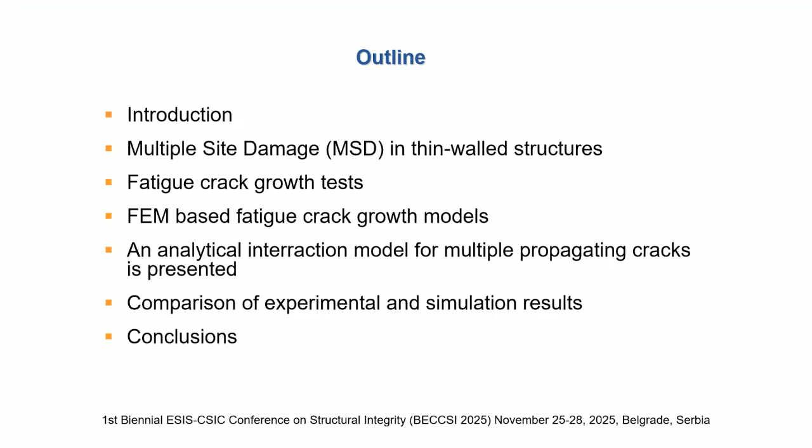So here is the outline. I will give a short introduction, then we will speak about multiple site damage in thin-walled structures and fatigue crack growth, present results of fatigue crack growth tests, then finite element-based fatigue crack growth models, and present in more details an analytic model for modeling interaction of multiple propagating cracks. We will compare experimental and simulation results and draw some conclusions.

Cracks may initiate at sharp notches, flaws or sites of stress concentration due to geometrical discontinuity. Several cracks initiate in a line, so-called multiple site damage is generated. It can eventually lead to crack coalescence, creating large-scale damage. Thin-walled structures such as aircraft and ship structures are prone to fatigue cracking and multi-site damage or multiple cracks.

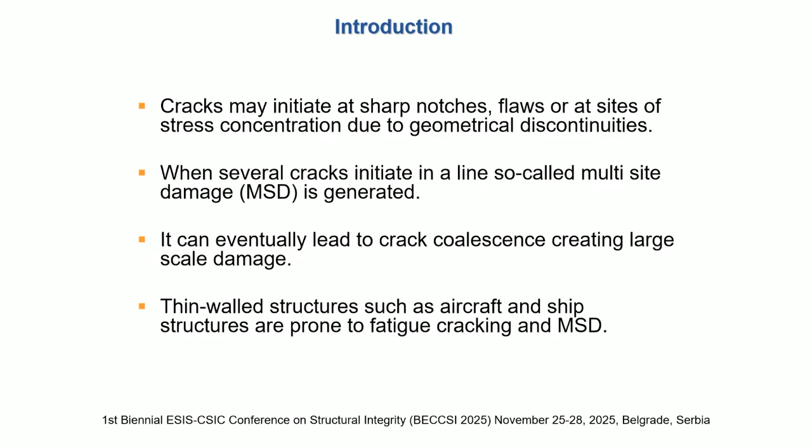Professor Željko nicely shows stages in the fatigue life. So we declare the initiation period and crack growth period. Here we speak about the crack growth period, about growth of large cracks.

As you know, we can do experiments and obtain the crack length with respect to number of cycles. Then from this we can design a crack growth rate diagram. And from this diagram, we can assess, for example, Paris equation constants or any other power law constants.

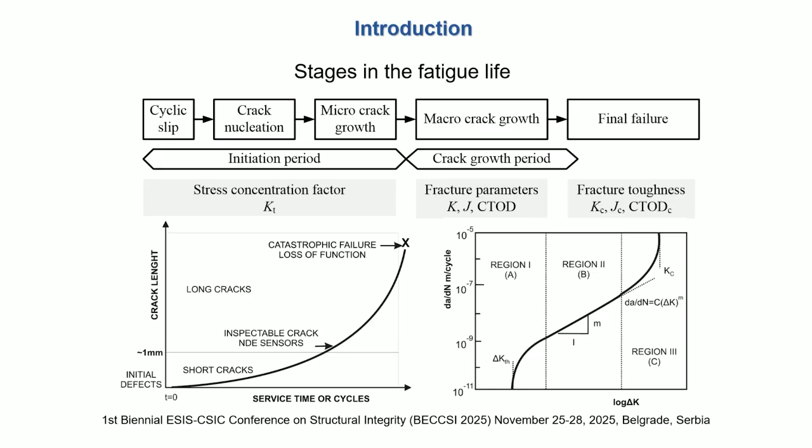So what is multi-site damage? Fatigue cracking examples - here we see a Aloha Airlines Boeing 737. This accident occurred in '88 or '89, I don't remember. What we have here is at the upper rivet row, initiated cracks at the rivet locations. Then on the surface, loading cycling under cycles which are caused by landing and taking off. Cracks are initiated, they propagate, they coalesce, and in this case, large-scale damage is generated.

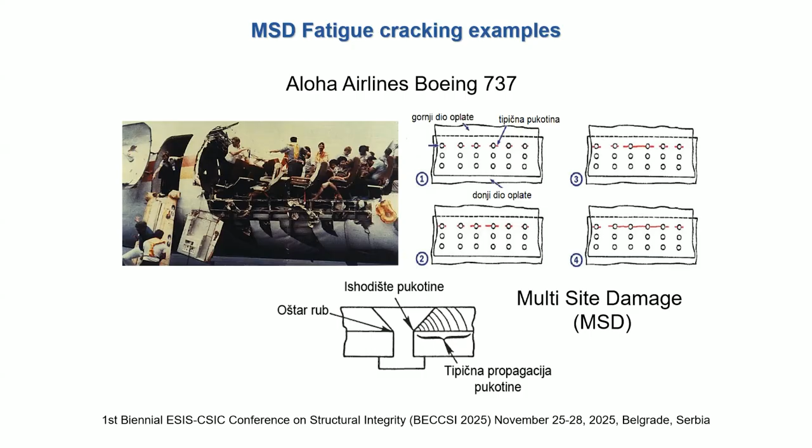Similar situation we have with ship structure. What you can see here is the deck structure turned upside down, and you have different panels in longitudinal directions, and you have also bulkheads every 5 meters. These details are produced by welding, so there are stress concentrations due to geometrical discontinuities and residual stresses. Cracks initiate here, similar to the Aloha example, on several occasions.

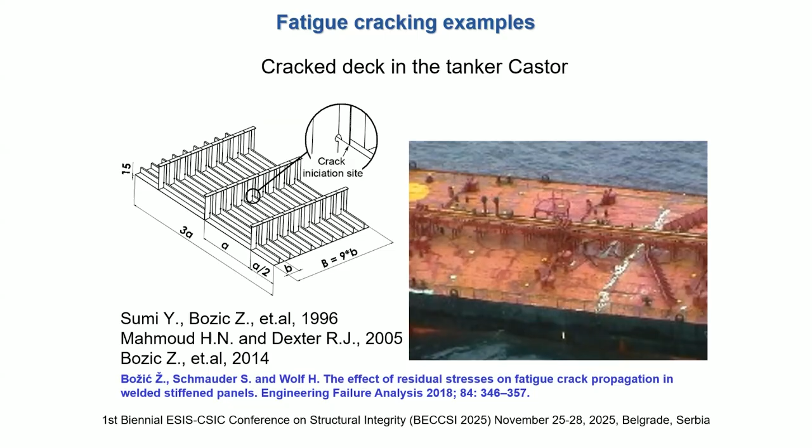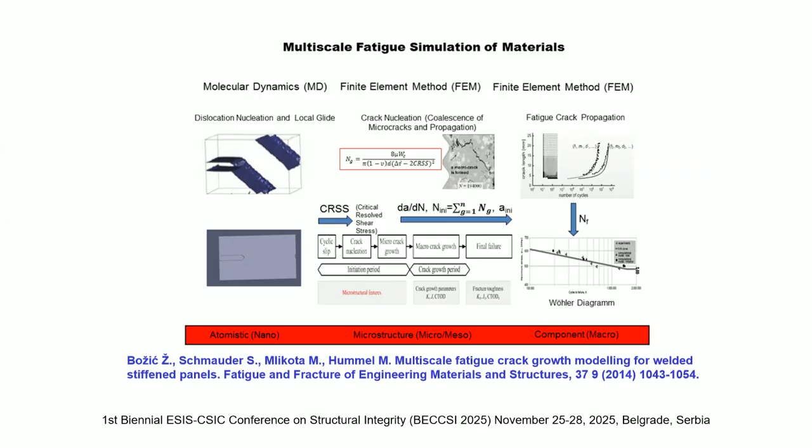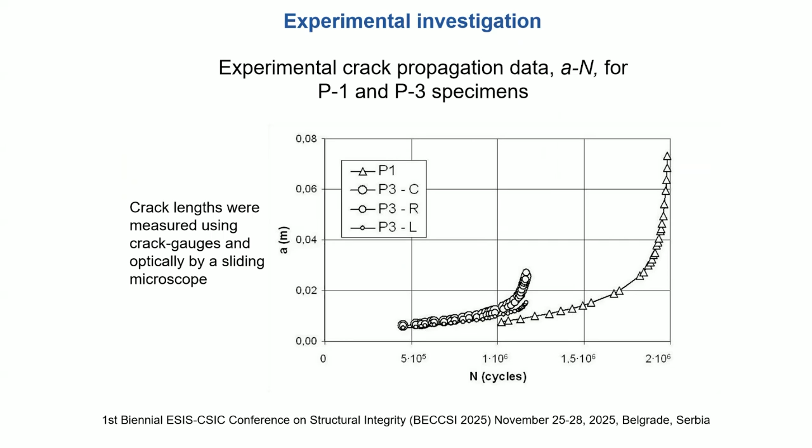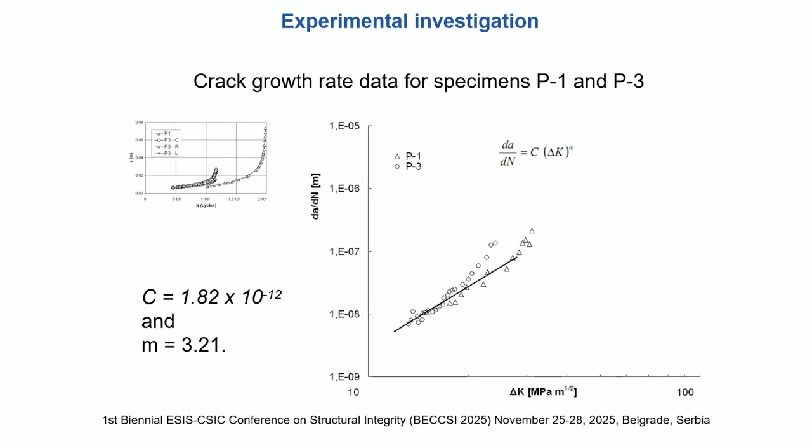This is what we obtained or analyzed experimentally, and we want to simulate this. For this, we will use the Paris equation as shown there. As mentioned before, we generate a crack growth rate diagram, and from this we obtain constants like C and M as shown here.

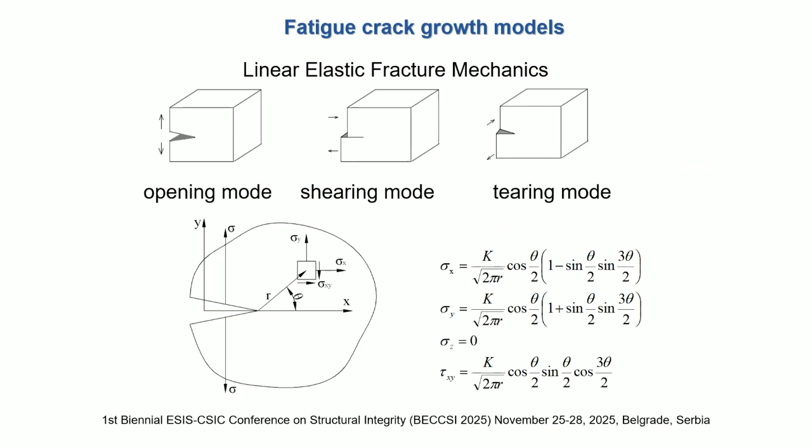And basically we have here mode 1 opening, only mode 1. This is how we look at this program. The cyclic loading, we have crack extension for each cycle, some delta A, and then use Paris equation to simulate this.

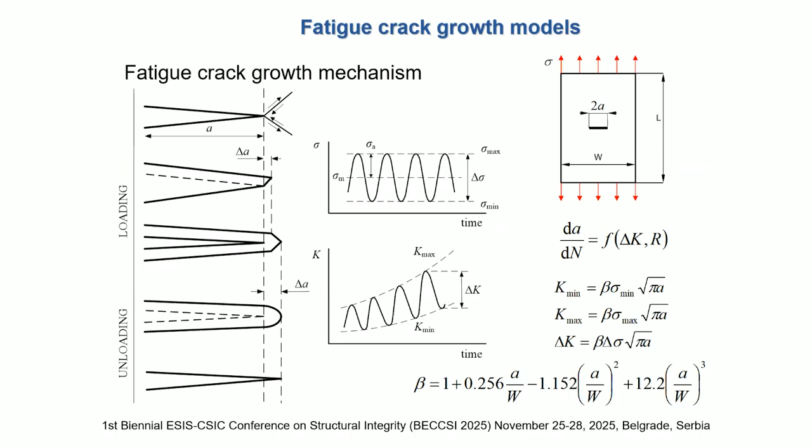This is our specimen P1 with 1 central crack. To simulate this, we can use Paris equation, but we need stress intensity factors. They can be calculated analytically, but it's better to calculate them numerically.

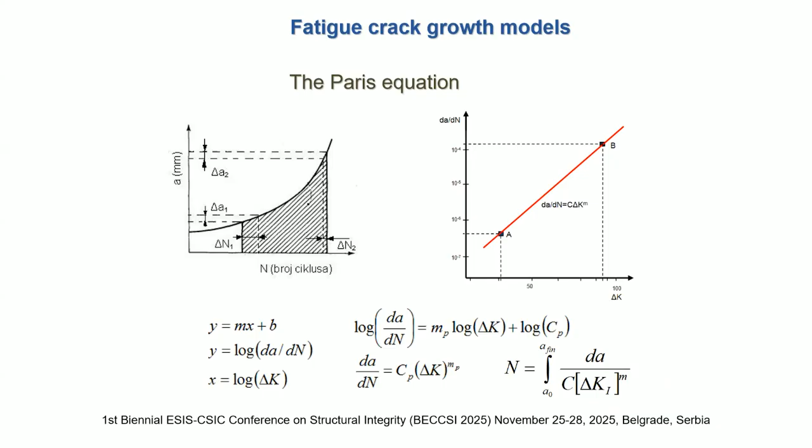This is very fine, we all know this. If we are not limited to the Paris model, we can use a modified Paris equation and consider delta K effective, the so-called Lukáš model, or we can use the J integral, cyclic J integral, effective J integral. We also can consider CTOD, and in nonlinear fracture mechanics, CTOD and J integral are correlated.

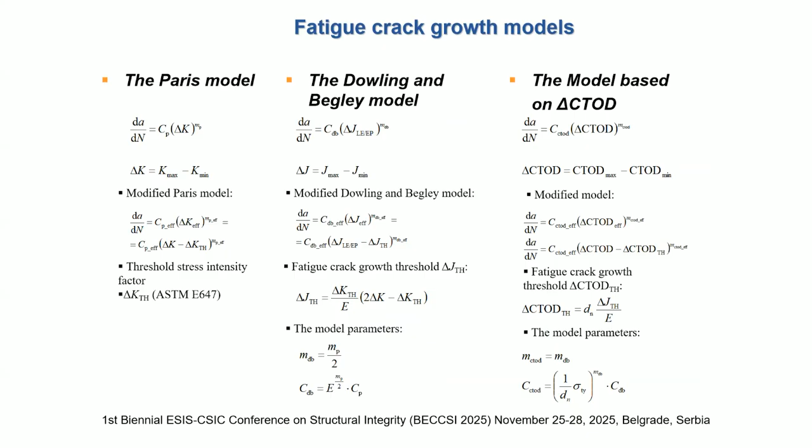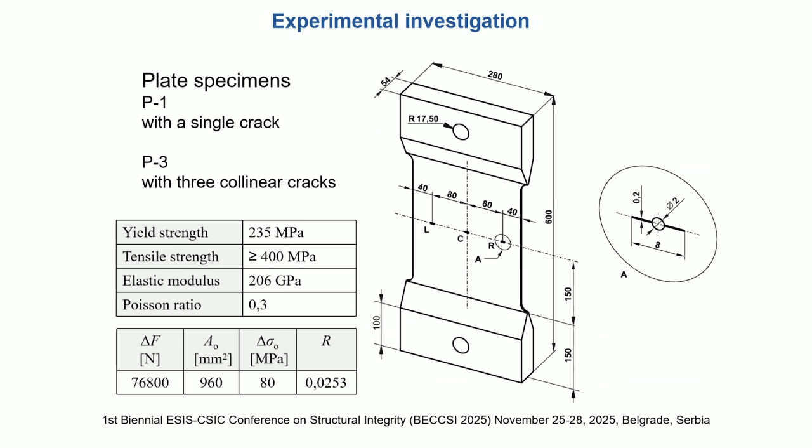So for our specimen, we have our specimen here. We can consider only 1/4 of this specimen in finite element, due to double symmetry. This is what you see here, 1/4 of the specimen, and this figure shows the stress intensity factor range with respect to crack length, with respect to half crack length.

So we have K now, and we have K not as a function, but as discrete points. So we will integrate this equation numerically.

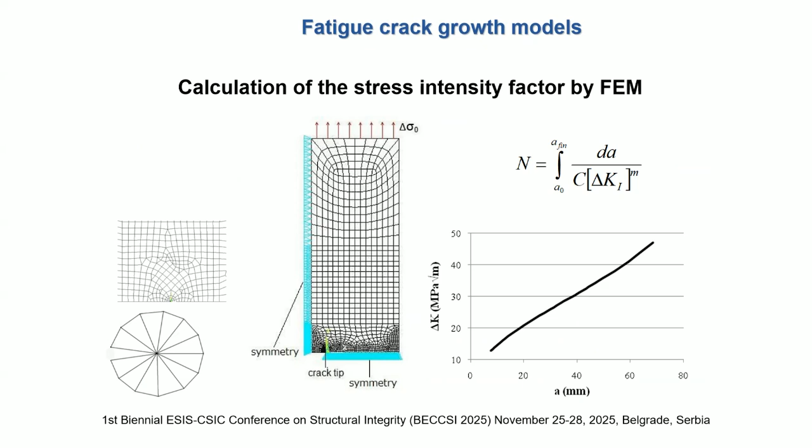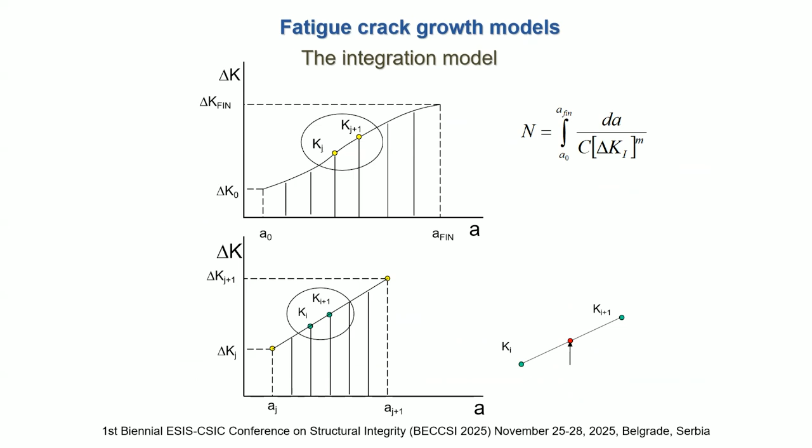Basically what we have here is a straight line between two points for which we calculate K. So it's a piecewise linear curve for which we calculate the stress intensity factor by this method, and we will integrate this equation directly.

Stress intensity factors calculated for P1 specimen shown here, and that's very easy to do for one specimen with a single crack.

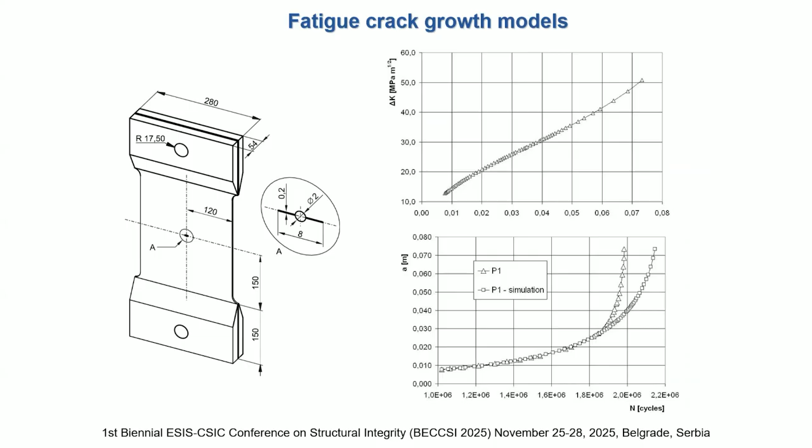And then we have some statistics done on the experiment of constant crack propagation, and the simulation is still using this model, according to which we use Paris. So this is what I just mentioned.

And for specimen with 3 cracks, this is the experimental result, and we want to simulate now. We want to simulate fatigue life of specimen with 3 cracks, and then it comes what I mentioned at the beginning, what also Dr. Son mentioned, interaction of this. How can we model interaction with cracks?

You can use the extended finite element method when you use that. And sometimes you don't have everything under control, but you have an analytical model which is perfectly under our control, and we will learn how it works.

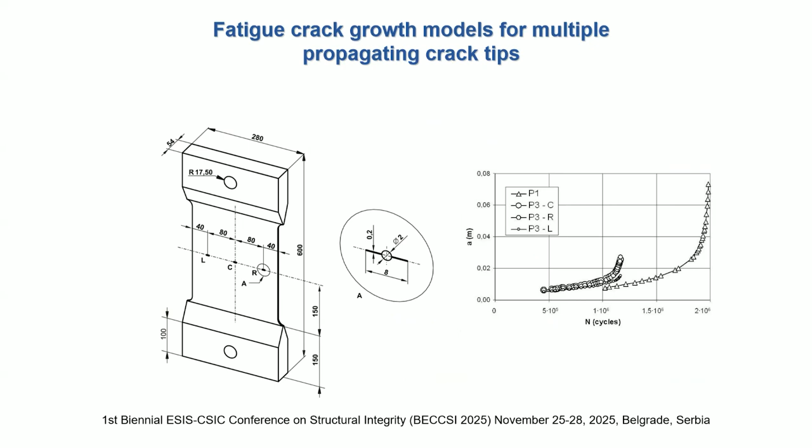So this is specimen with 1 crack before the experiment and after the experiment.

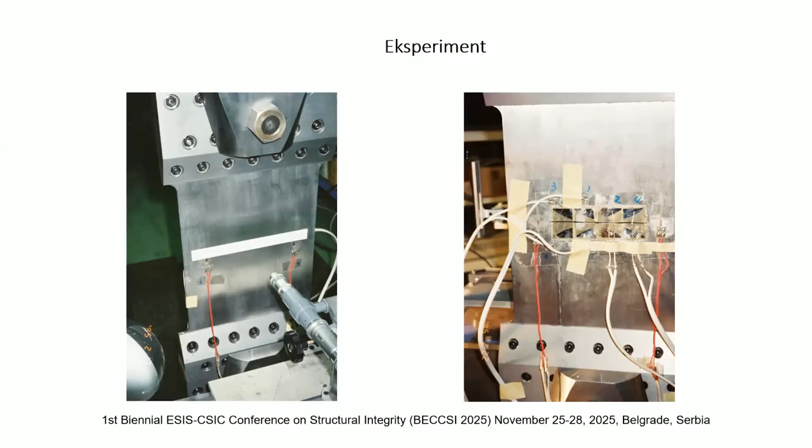And so this is 1/4 of our specimen. We have 3 cracks, but due to symmetry, we have only 1/4, and we can basically have 6 crack tips, but due to symmetry, we consider only 3 crack tips, 1, 2, and 3.

So we show them here. What do we do? Well, at first we should assume initial crack length, and we have taken this from our experiment. The cracks were of certain lengths. So we started from the experiment, then we simulated and compared with this later with the experimental result.

So we have to take 1 crack tip as a reference. This is, in this case, tip 1. And for the other 2 tips, then we should see how they interact.

And so this is what we have as a first one from our experiment.

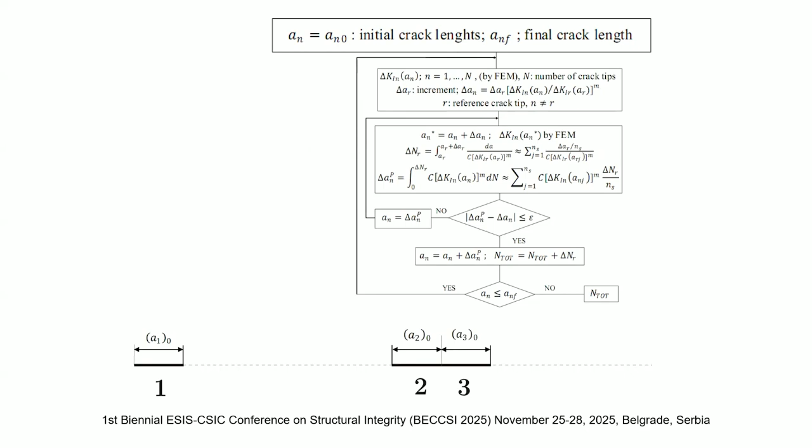Then we give some initial increment for the reference crack tip, and then we assess increments for the other 2 crack tips by using Paris law in this way - good way to do it. Then we have this assessed increment for crack tip 2 and crack tip 3.

And then we have to check, is it good or not? How do we check this? We will calculate delta a by the opposite way. Now we don't calculate number of cycles, but we calculate propagated crack length. So we do this for tip 2 and for tip 3. And then this is better, it is better.

This, and we should repeat these steps until we receive convergence. If we receive convergence, when this difference between assumed and calculated crack length is less than some limit which we give there, some tolerance. And then we repeat this, we repeat this, and when we reach some final crack length - this final crack length can be determined by, if fracture will occur, if a crack reaches our critical crack length - so, some crack length before fracture occurs.

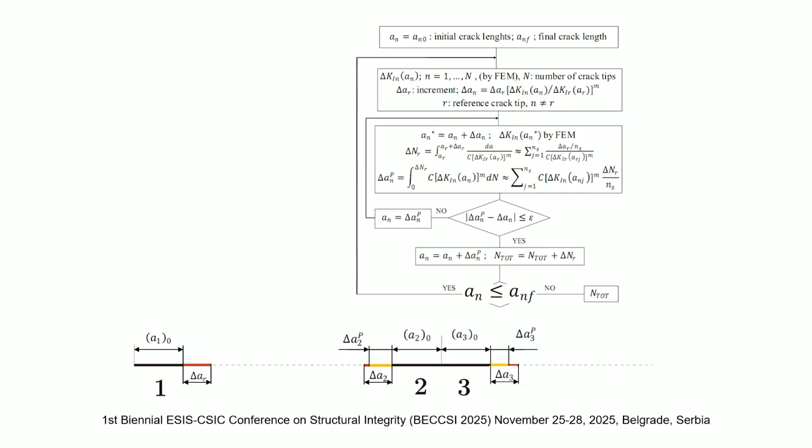Yes. And then we show results, what we have achieved. So for these 3 cracks, we had stress intensity factor ranges shown there.

Then we compare simulation results with experimental results. You have this big circle for tip 1, and circles, small circles, for average crack length for tip 2 and tip 3. That's for the experiment - the big circle and the small circle. And then we have simulation results as rectangular marks. You see that for initial crack lengths, with our solution we have very nice agreement with the results.

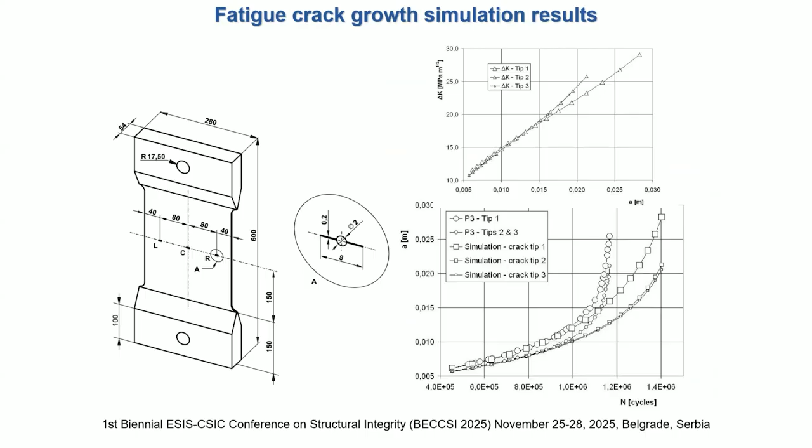And how do we know that what we have simulated is good or not good? We have taken as a reference crack tip 1. So we will repeat the simulation, we will take another crack tip, tip 2, as a reference. And then we'll compare these 2 simulation results.

This is what I wanted to show you - this analytical method for taking into account interaction of multiple propagating crack tips. We can do more examples, some cracks can be longer and others shorter, and again to see this interaction. So basically, there is no interaction if these cracks are far apart and if they are short. But if they are big, then there is very strong interaction.

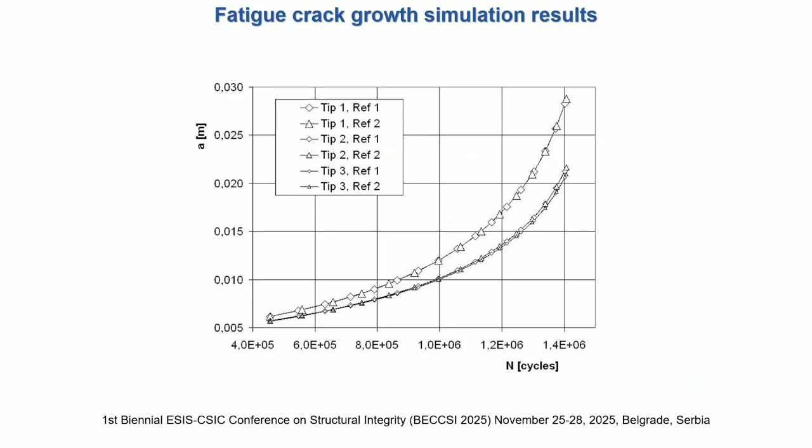Fatigue crack propagation life, especially with a single crack and multiple side cracks, were studied. An incremental simulation procedure for multiple propagating cracks is based on a fatigue crack growth law model. In this case, this law was introduced and implemented for fatigue placements with 3 collinear cracks. An independent procedure can be applied to fatigue life simulation of thin-walled structures, such as ship structures or airplane structures, offshore structures, and other structures, and used for inspection schedule planning.